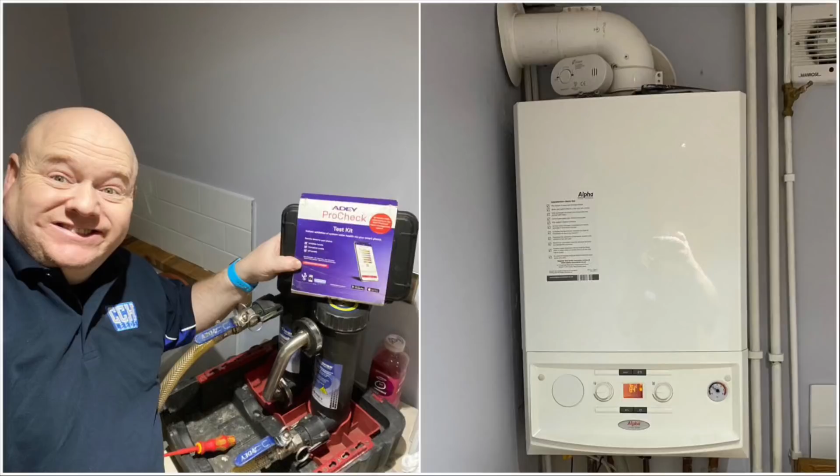Boiler not working, system blocked. Today we're doing a Magnacleanse. I've got there, and it's on an Alpha boiler.

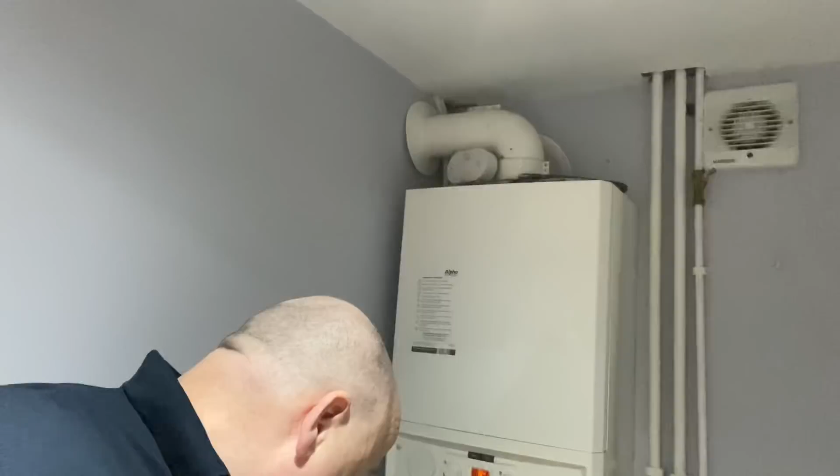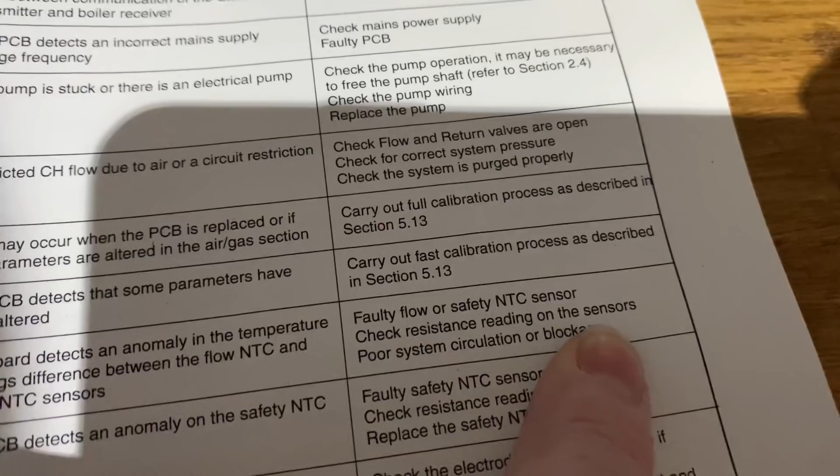And this Alpha boiler has been giving a fault code of 73, which is, if we have a look in the book, fault code 73 is poor system circulation or blockage.

So it's got poor circulation or blockage, and if we have a look at this, I'll just show you the filter on this. So it has got a filter fitted. You can see it's really mucky. So whoever installed this boiler, possibly they didn't flush the system when they installed it. What they probably did, and I'm just guessing, was just put a filter on.

So what we're going to do, we're just doing a Magnacleanse on this, as I've said already. I'll show you how to do this Magnacleanse, and then after the Magnacleanse we're also going to do a flush on it. So if you have a look at one of my last videos, how to flush radiators or something like that, that'll show you how to do the mains flush side of it. So let's have a look at this Magnacleanse now.

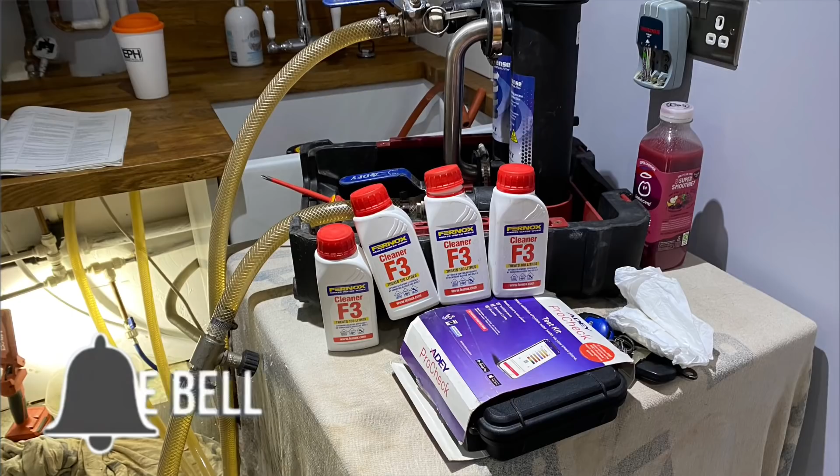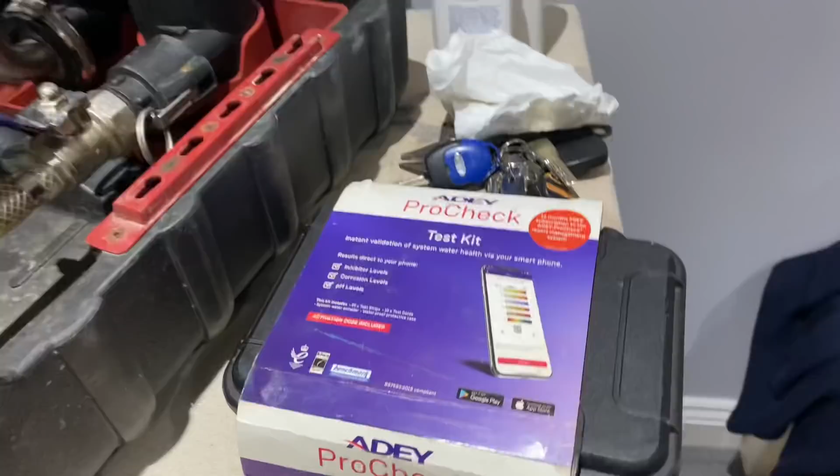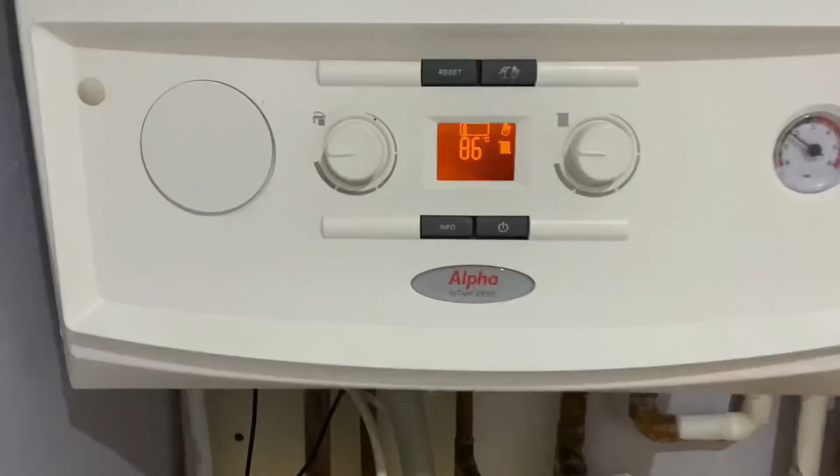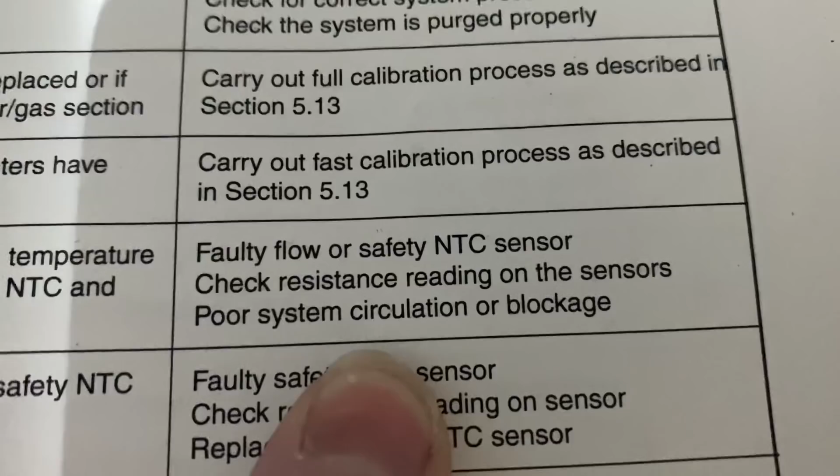Before I started to do the flush on this, I actually did a water sample with the Adey Procheck, and it failed the test. I've connected the Magnacleanse onto the system here. What was happening with the boiler, it was only going up to about 45, and then it was cutting out, and it was giving a 73 fault code, and that tells you about the poor circulation or blockage.

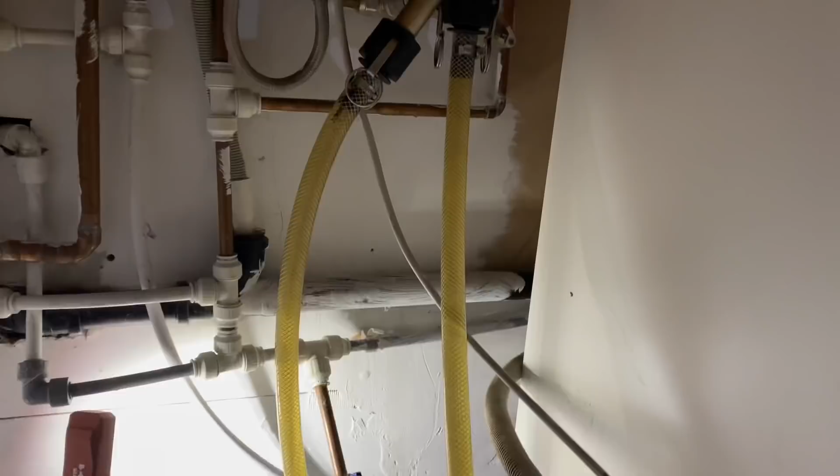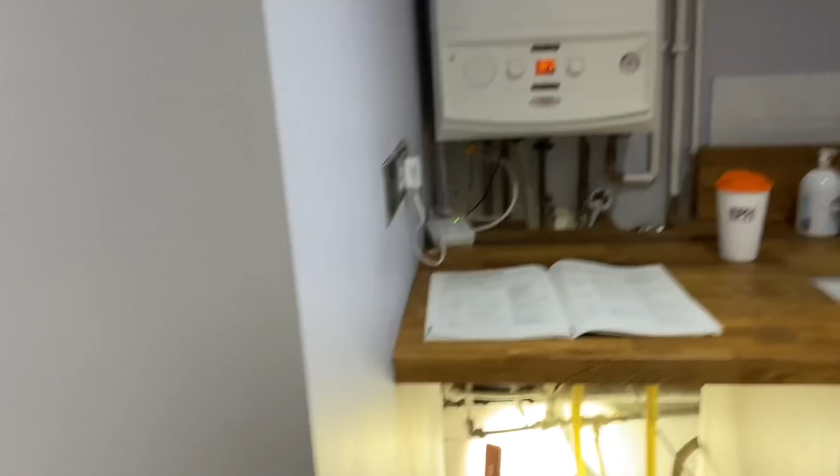So we've removed the old filter, and I've connected the adapter that you get with the Magnacleanse into here, and then we can just put all those chemicals into the Magnacleanse. And I've just used F3 on this. I've used 4 tubs of F3 because 2 tubs of F3 is classed as F5.

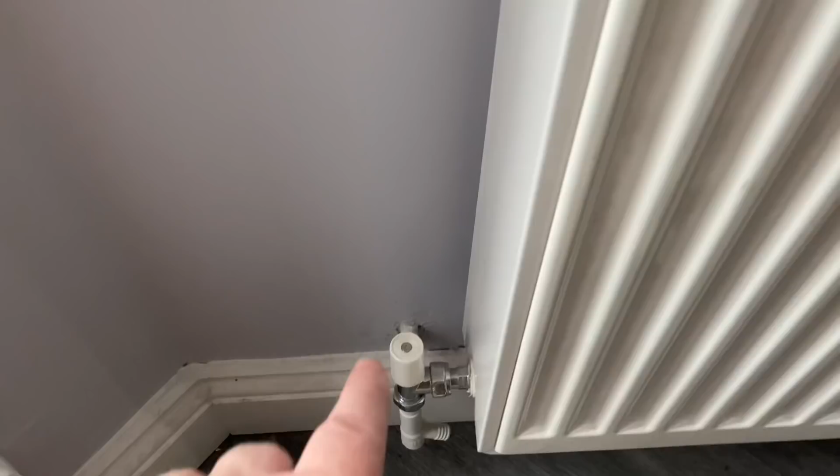So if you have a look at the radiators here, I've removed all the TRVs. And one thing to point out as well, these radiators are all new radiators. So people that say that new radiators don't need flushing, well, that's incorrect. Also, I've fully opened all the lock shields. And as I say, all these radiators are new. So I've removed the TRV, thermostatic radiator valve, off that one as well.

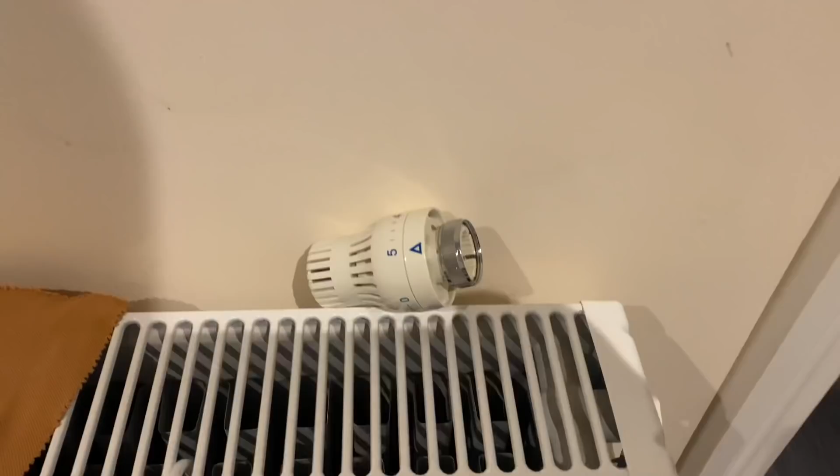And it's only a really small system, this. Got another radiator here, again a new radiator, and this one wasn't working very well at all. And then we've got another new radiator here. All the system is new, so it's got 4 radiators and then a towel rail. And this towel rail in here didn't come on at all. It didn't work at all. So hopefully we'll get this one working.

At the moment, what we're doing with this Magnacleanse is, I've put quite a lot of chemicals in. I've used F3, so most people will know that 2 lots of F3 is classed as F5, which is power flush chemicals. This is a small system, but I've used 4 of these tubs. The boiler was continually locking out. It was locking out on heating. It was also locking out on hot water when you ran the hot tap.

But now, if we run this hot tap now, the chemicals have been in for a while. And before, this would just lock out. It'd go to the 73 code, because it was just saying poor circulation. So obviously there was an issue with blockage, but you can see we're mucking it.

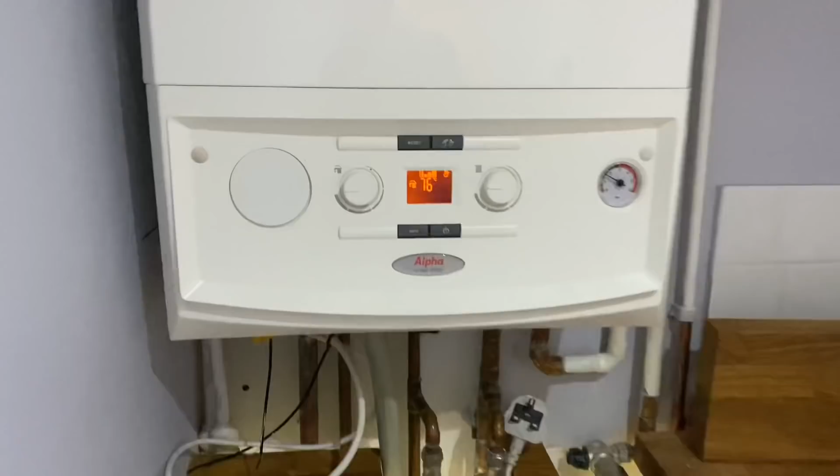So it's running now, is the hot water. We've got the Magnacleanse on. We've got our chemicals going in, and it's no longer overheating. So what we know now, we know that we've made a difference to this system already, and we know that the system was sludged up.

And what I'll do afterwards, I'm going to use the Adey Procheck, and we'll put some inhibitor in. We'll use the Adey Procheck, and we'll make sure that it passes the Adey Procheck.

And bearing in mind, it is Sunday today, so yeah, me and Luke working again. How are we, Luke? Yeah. On a Sunday. People shouldn't have to work on Sundays.

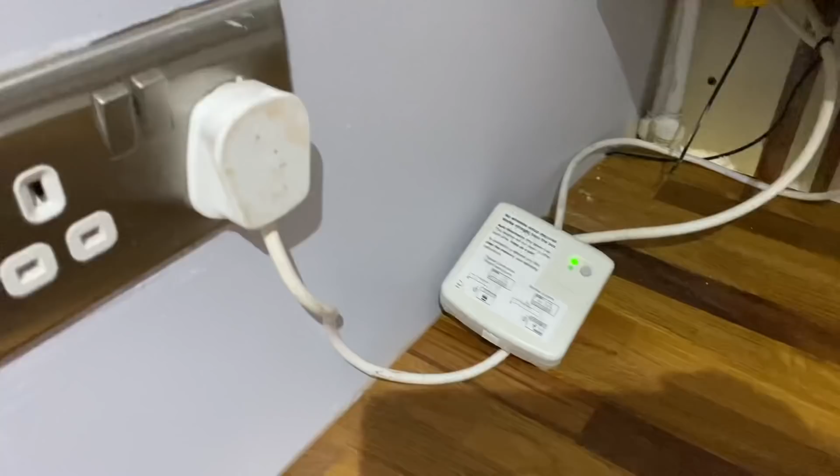And this is just an example of why sometimes it's worth paying a bit more to get a good quality boiler installed, and then you don't pay more in the long run. And now I'm trying to get as much of the chemicals out as possible, so I'm going to flush this now. So I've got the filling loop partially open, and the boiler's working.

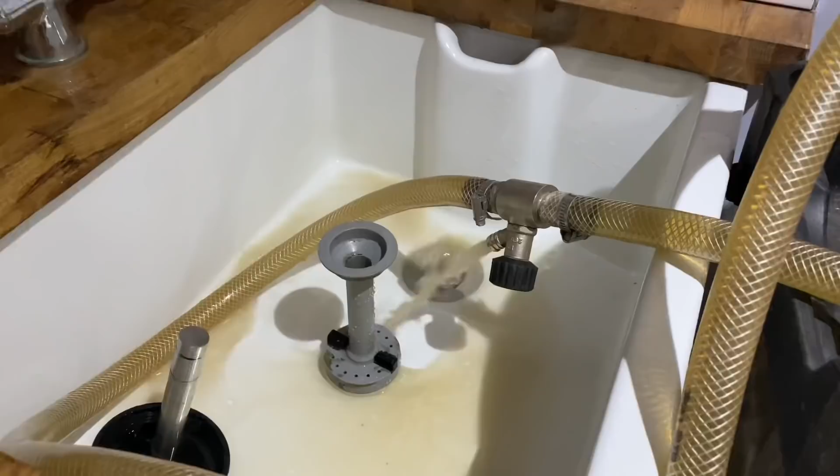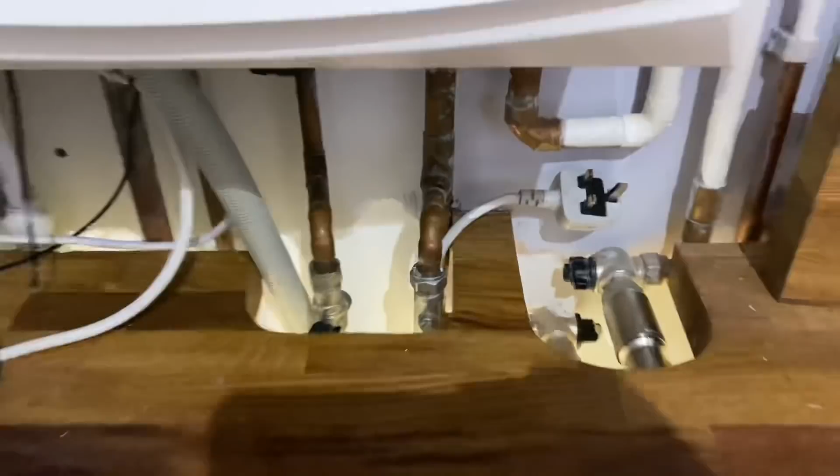It's up to pressure there, look, you see, I've got up to nearly 2 bar, and I've opened the drain off on the Magnacleanse. Just open that a bit more, and then that'll drop the pressure down a little bit on the boiler. See, it's just gone down ever so slightly there. So with the filling loop open, we've got cold mains going to this pipe here, and that's going back into the boiler on the return.

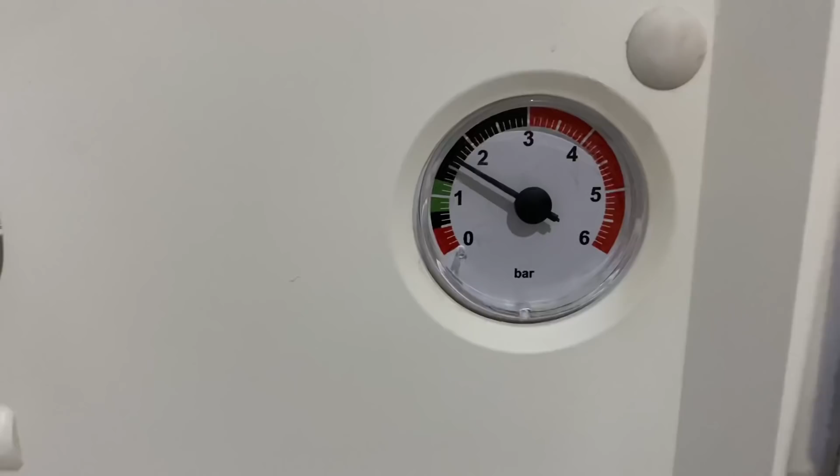And then obviously we're flushing it out on the filter, on the Magnacleanse, on the hose. So I'm just going to open this a bit more, this flow for the cold. Just keep an eye on the pressure, continually keep an eye on the pressure, and then just open the drain off a little bit more. Just try and balance this, but what we don't want to happen is we don't want the boiler to go to lockout, so you do need to be a little bit careful how you do this.

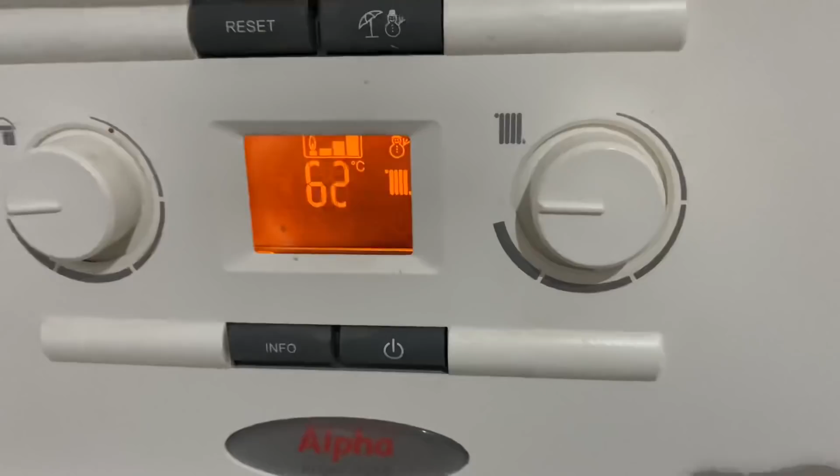We can see the boiler staying on now, and we need to get as much of these chemicals out as we possibly can. So I'll continually flush this and do a mains flush after.

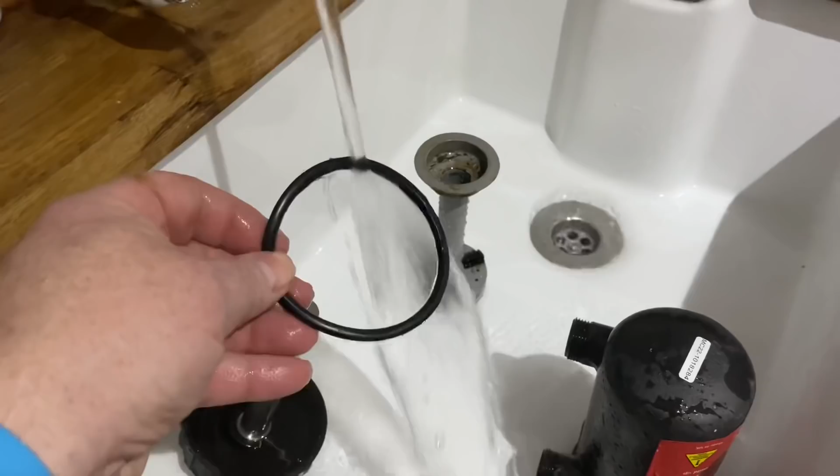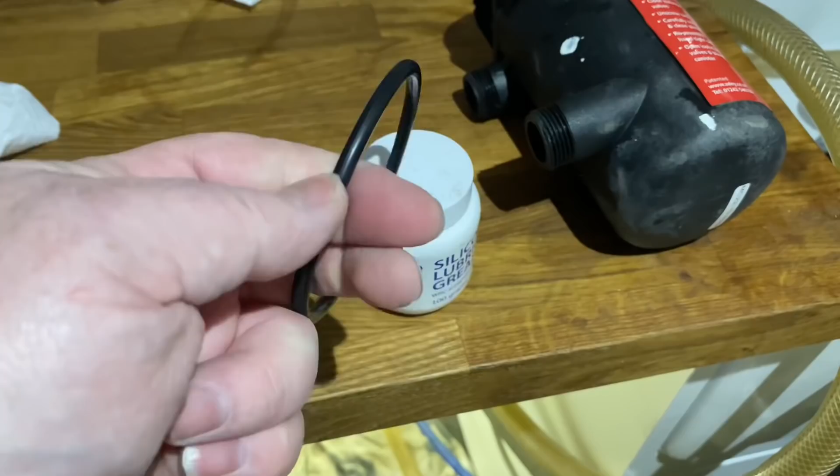I'll go over the full flushing at the end on the board at home, but I'm just washing the O-ring now for the filter. I'm going to put some silicone grease all around the O-ring, I find it makes it easier. And also I'm going to put it on the threads to make it a bit easier. Sometimes they cross thread, so you've got to be careful. And then also I'm going to put it on the lid as well, so it's just easier to screw on and off.

So we've cleaned that system now, and afterwards we've done a test. We did the Adey Procheck to prove that we flushed it correctly. I'm going to do a diagram on this board here just to show you the Magnacleanse and what we're trying to achieve when we're doing a Magnacleanse.

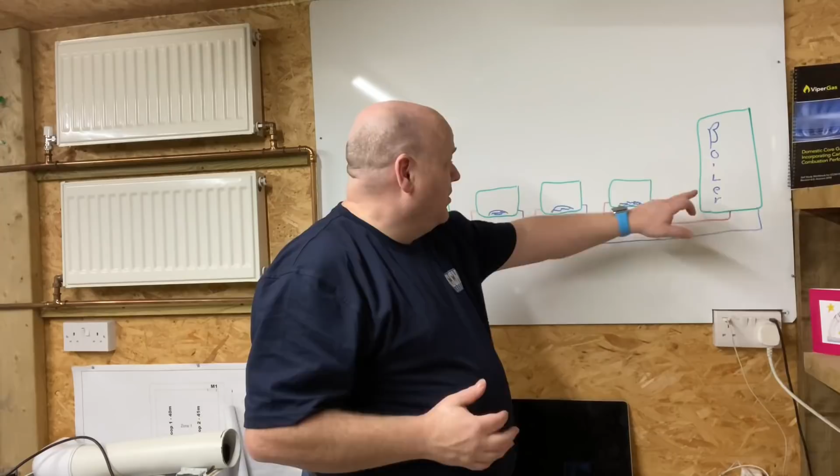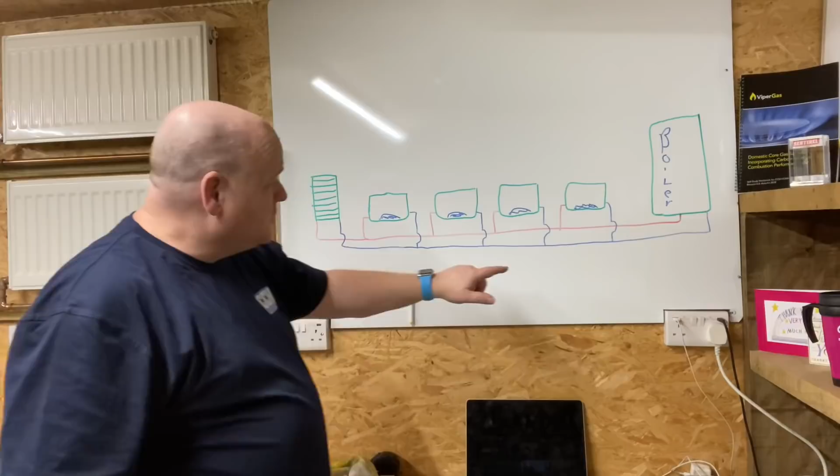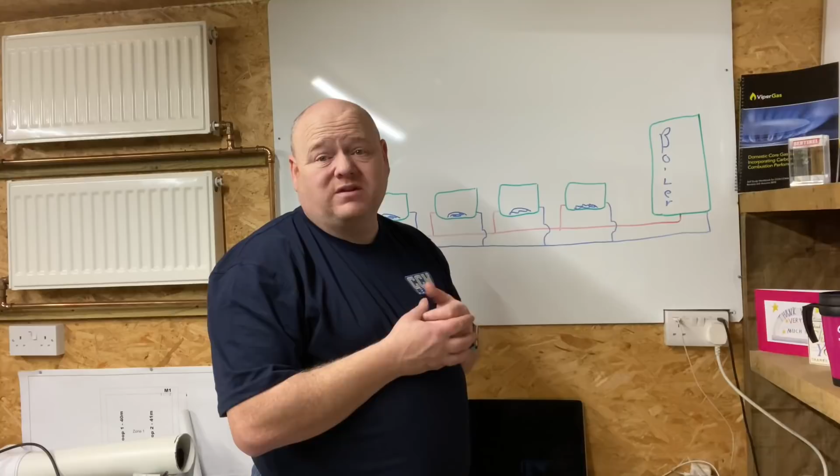So just to explain what we've done, we've got our boiler, and what we're trying to do is flush the system out. Just move that over there a little bit. With this particular job, we only had 4 radiators and 1 towel rail. So all we've done is we've put our MagnaCleanse on, we've put it on the return, we've connected it into the filter. The filter was already on. As we've seen on the filter here, you can see it was really mucky, so the system definitely needed cleaning out. It was having fault codes, poor circulation, blocked.

So as I said, first of all, I thought it was just because the lockshields were down, or the TRVs were down, because the system was new. But the towel rail was fully open, so it couldn't have been because of that. So I thought, well, I'm gonna have to put chemicals in, I'm gonna have to flush it, because if I can avoid charging customers, then I will.

You know, a job that I went to yesterday, which I'll do a video for. I went to a job where it was a power flush job, but it didn't need a power flush. It was something else that was at fault, and that job was a very expensive job, and it turned into a really cheap job for the customer. So I will always give honest advice to the customer regardless. Anyway, getting back to this.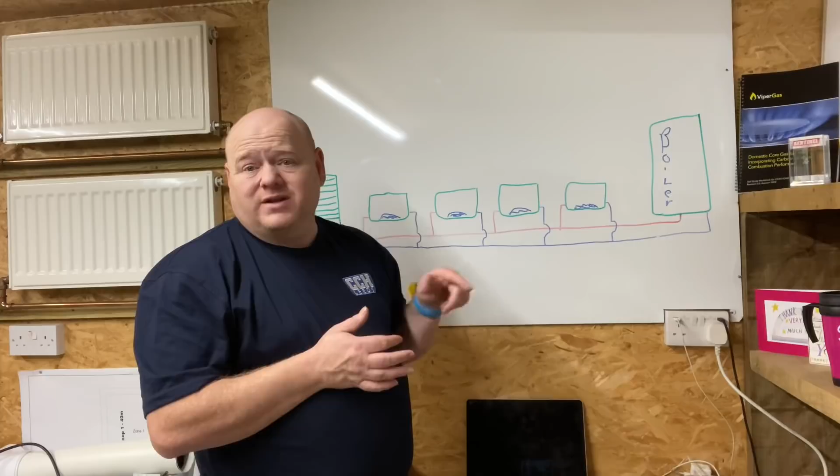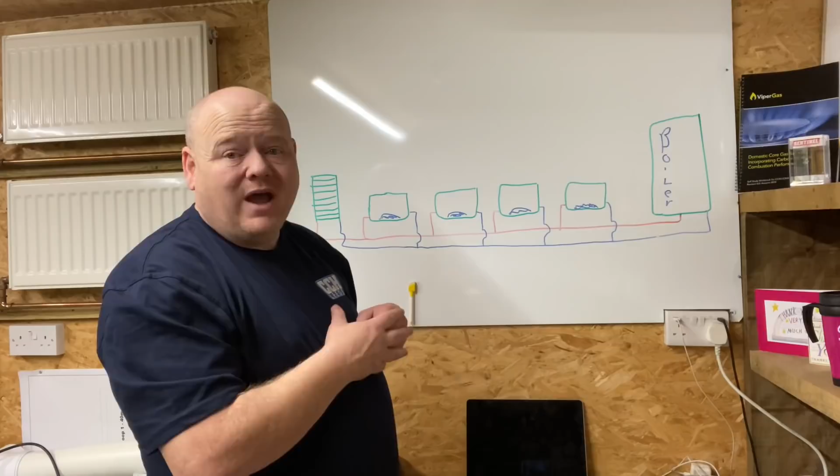So all we've done, when we do a MagnaCleanse, we've put our chemicals in, we've got our MagnaCleanse here, we've got it on the return pipework back to the boiler, and then we're letting the chemicals circulate. And then what I would do, first of all, I'd leave all the radiators open and let the chemicals circulate for maybe an hour, maybe 2 hours, depending on how bad the system is. Leave that to circulate round, and then the ones that are the hottest, I'd turn off.

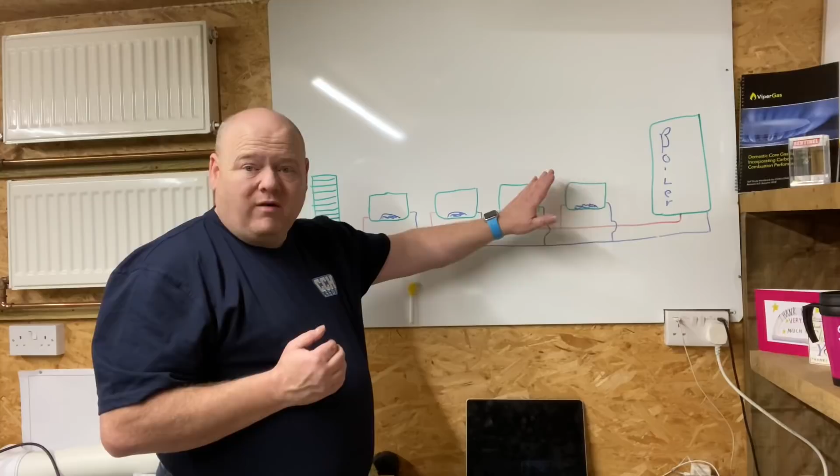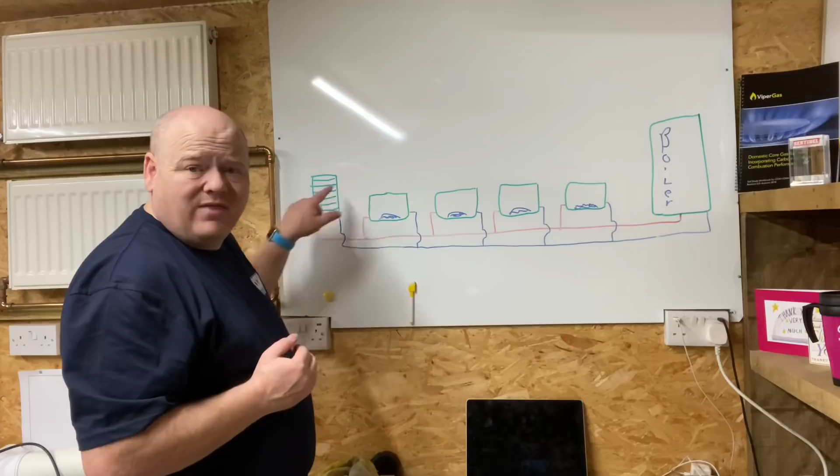So maybe first, all these radiators to start with here, I'd start turning them off. So turn your first one off, turn your second one off, turn your third one off, and then maybe just leave these last two working, and then let the chemicals circulate around all this, and then maybe just turn the fourth one off and just let the chemicals go around the last one. So you're getting the full force then of the pump from the boiler, and it's going round that radiator. You might want to leave it so you've got two open.

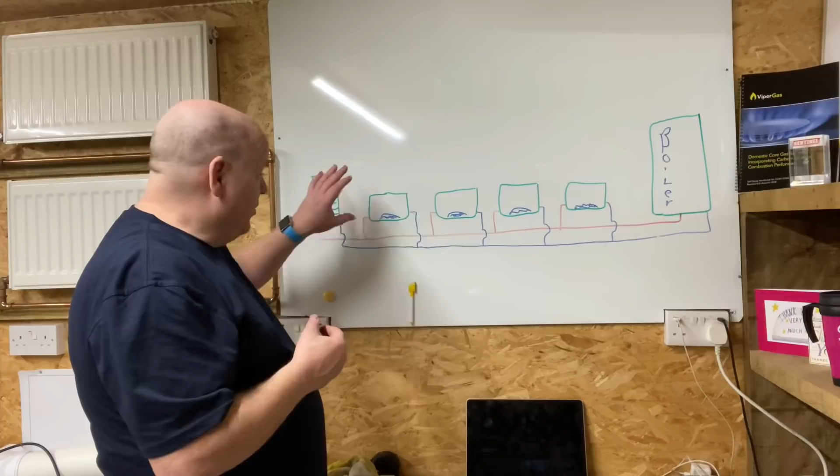Depends on the system really. And then once you know that you've got these working, once you know that these are really good, then you can open the next one and go back and close one of the previous ones off. And just the same across the system. So open the next one, close the previous one, open the next one, close the previous one, and then you're letting all the chemicals go around the system.

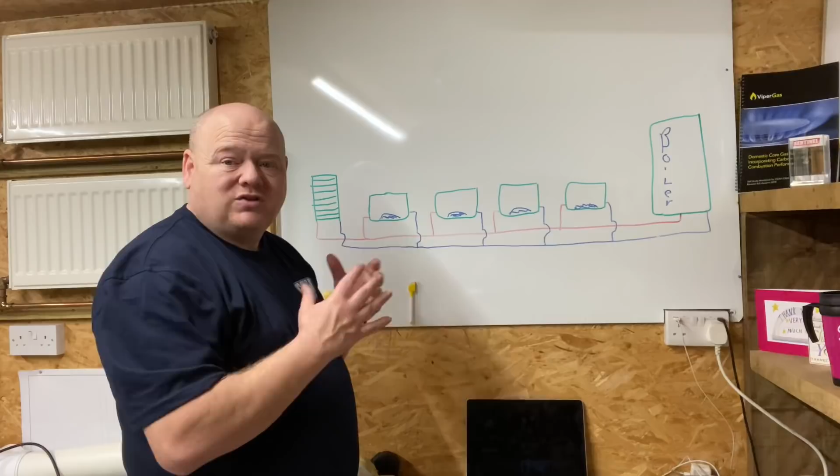And once you've cleaned all that, so now you know it's all working perfect, all the system's getting warm, it's really, really good, then what I would do is always leave it working for a while to make sure that you've definitely cleaned it good. You could also look with a thermal imaging camera if you've got one, and you can see if this part of it, if that part of it's clear.

But then the most important thing is you need to get all that muck out of the system. So if we go back to my previous video on flushing, and I'll put a link in this video here, you can just mains flush it then.

So a lot of people think that you'll just do a MagnaCleanse, you just put your filter on, and then it'll just get all the muck out. Well, it might get a lot of the sludge out, but it might not clean the system very well. So you do need to make sure that you do a mains flush afterwards and get as much of the muck out of the system as possible.

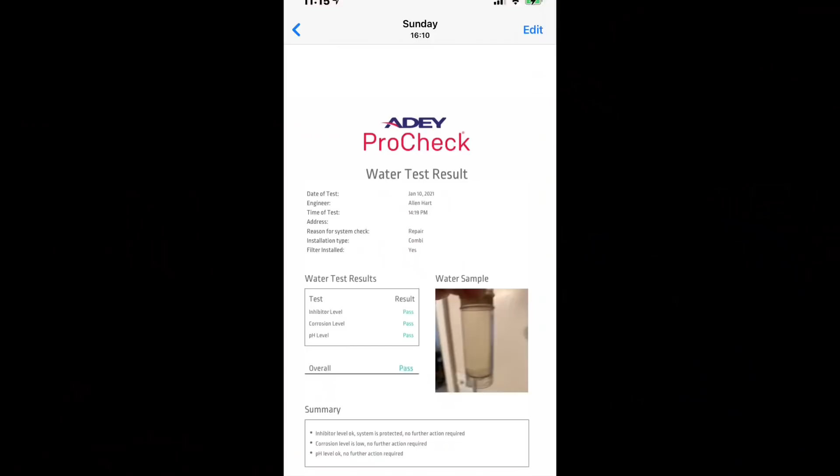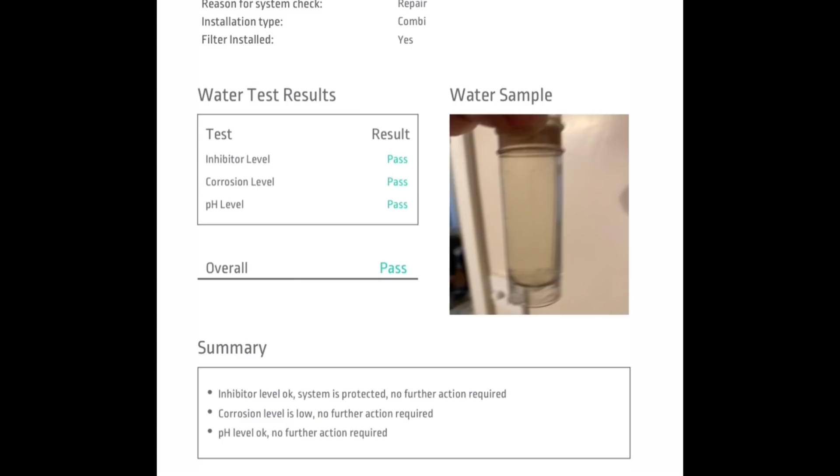I just thought I'd show you the actual test results. So this is from the Adey ProCheck, and it just says pass, pass and pass. So we know the inhibitor level is okay, corrosion level is okay, and the pH is okay, and overall pass.